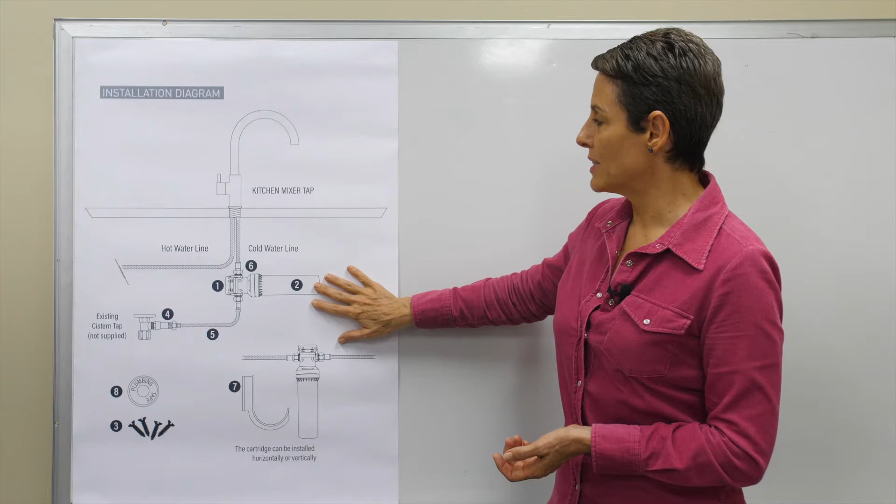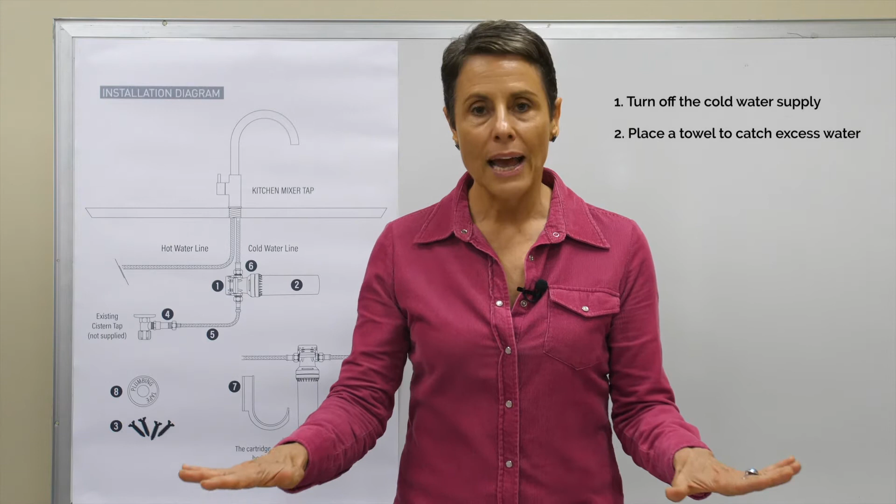Before I take you through how to actually install the filter system, there are a couple of things that you need to do first, and they're important. You need to turn off the cold water supply underneath your kitchen sink. There's a little tap, go and turn that off, and then place a towel underneath to catch any excess water. And then you're going to disconnect the cold water hose from your mixer tap.

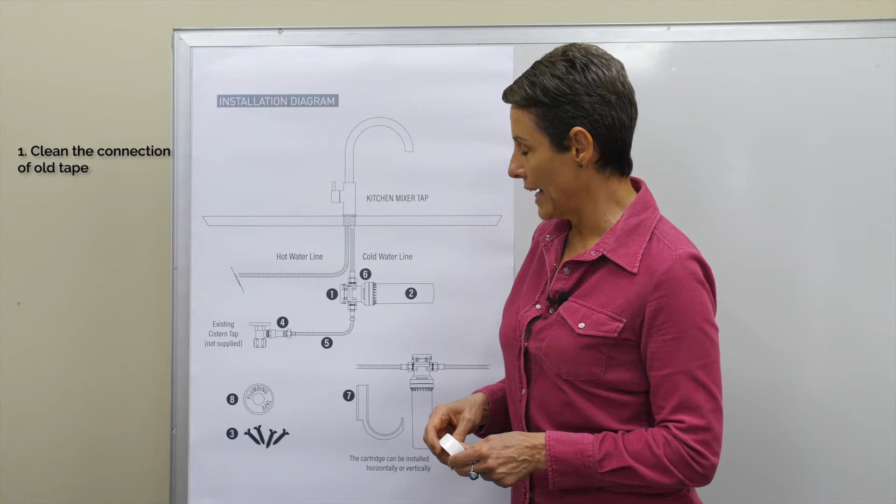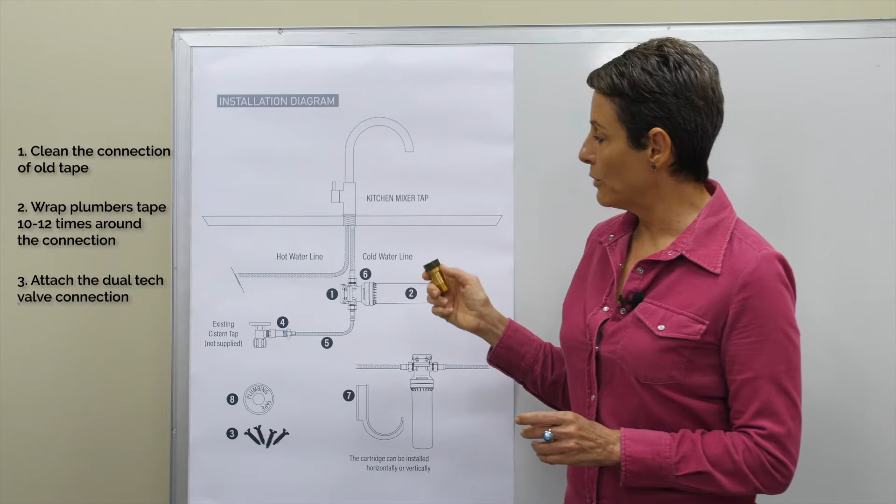So once you've disconnected the hose, you're going to clean the connection of any old tape, and then you're going to wrap about 10 or 12 times some plumber's tape around that connection, and then you are going to attach the dual check valve to the connection that you've cleaned and wrapped the plumber's tape around.

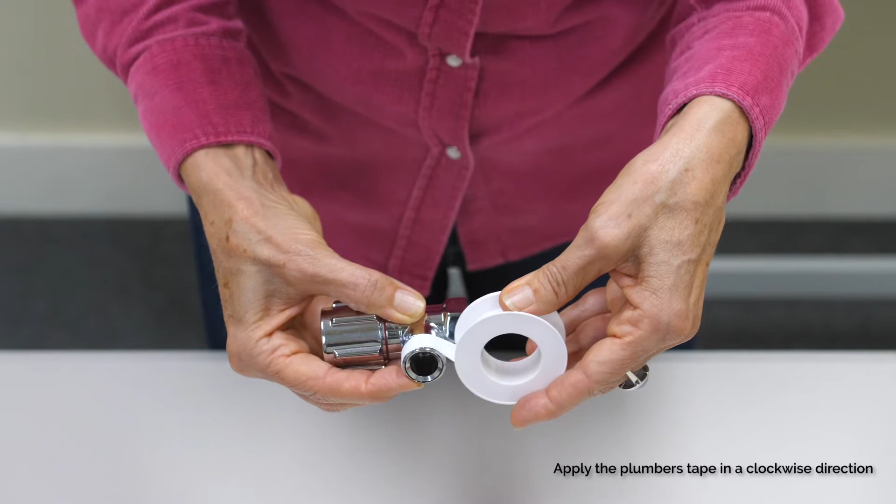A tip when you're applying the plumber's tape: looking at the actual thread, at the end of the thread of the tap, make sure that you apply it in a clockwise direction, and if you actually have the tape rolling underneath, you'll see how easy it is to bring it around. Just make sure you do it in the clockwise direction as I am doing it.

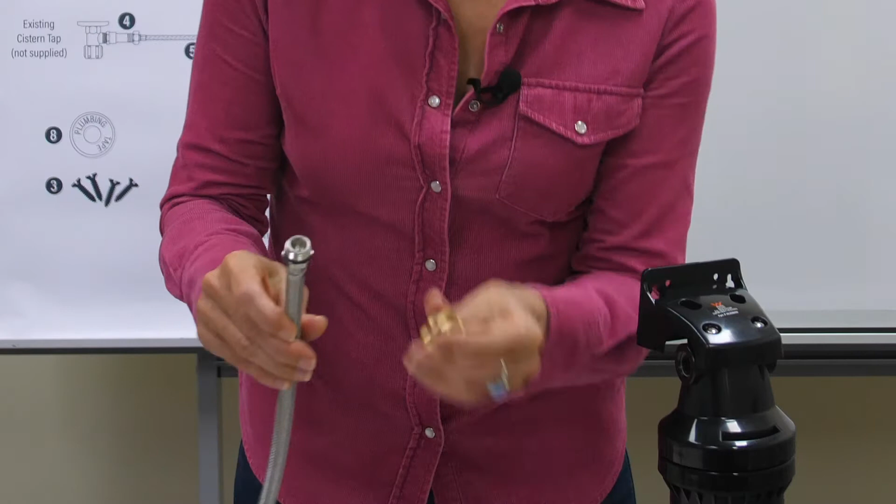So what you'll notice on the head is there is an inlet side, and it says in, and an outlet side which says out, which corresponds to these two fittings that I'm about to show you. Before I move on to that, it takes me back to the important notice which we really want you to read, because if you use any plumber's tape or sealing compound, you will void your warranty. On these two fittings, you will notice that there are O-rings. So please don't use any of the plumber's tape or sealing compound.

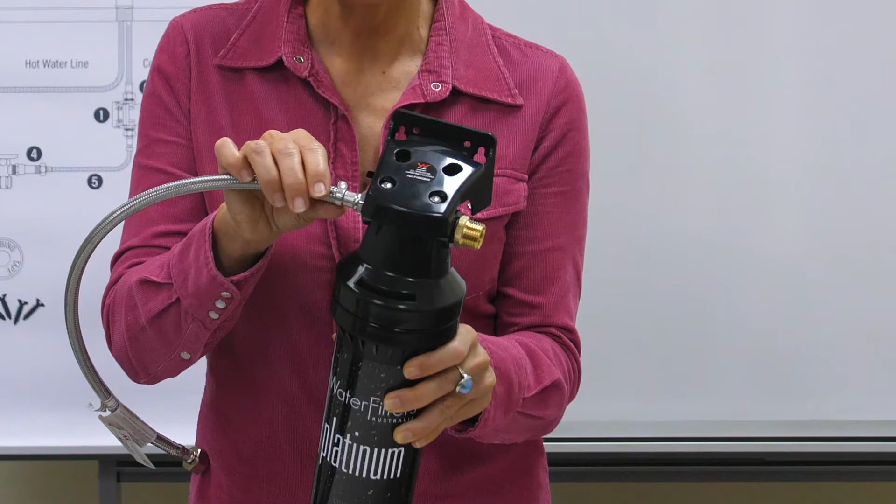And this part goes into your inlet side there, and the brass hex nipple goes into your outlet side, like so. One more tip when installing these fittings: just make sure that the O-ring touches the filter head, and then turn it 1/2 turn, and please don't over tighten.

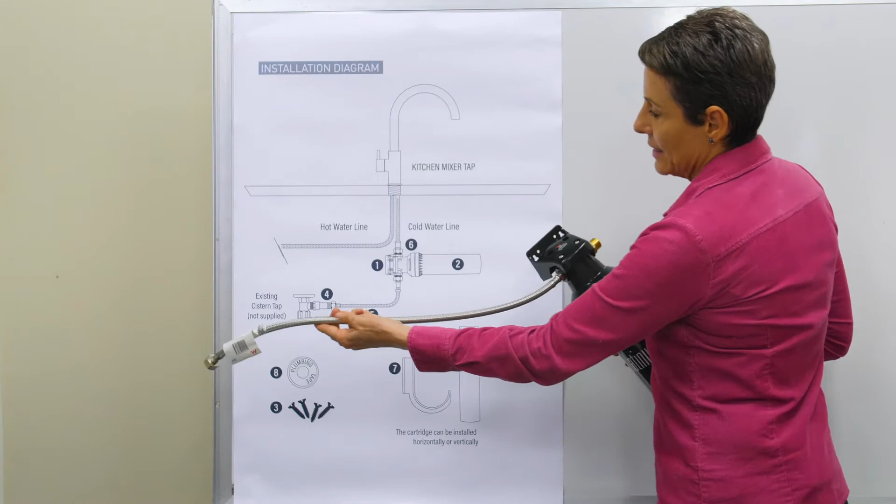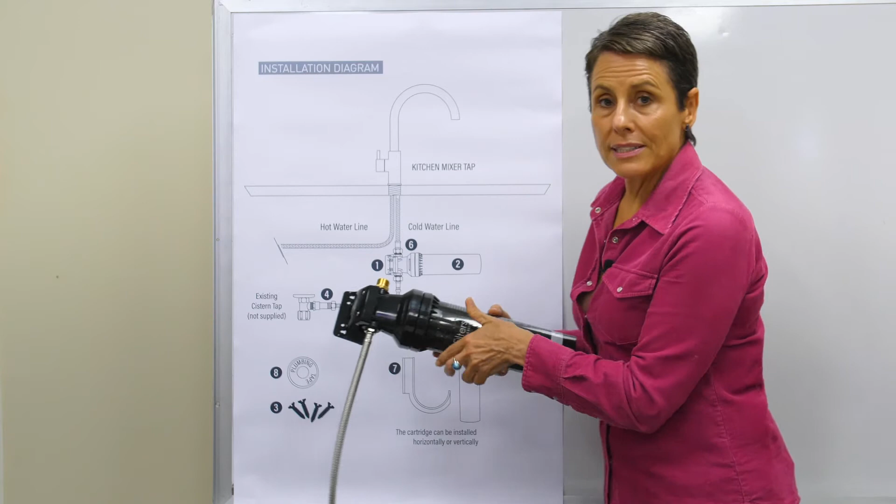Next, you're going to work out the best place underneath your kitchen sink to install your filter system. Remember that this line is going to attach to your existing cistern tap, and this is going to attach to the cold water line up to your kitchen mixer tap. The beauty about this system is it can be installed either horizontally or vertically, as in the diagram.

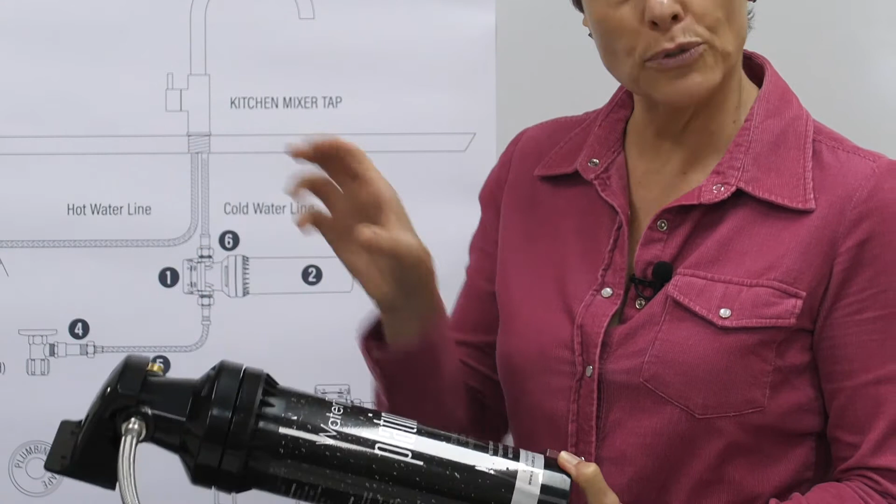It's important when you've chosen where you're going to install the system that you do leave enough room for when you come to replace the filter cartridge in a year's time. You need enough room to take the filter cartridge out and to reinstall a new fresh filter cartridge, and also make sure you don't crimp the flexi hose.

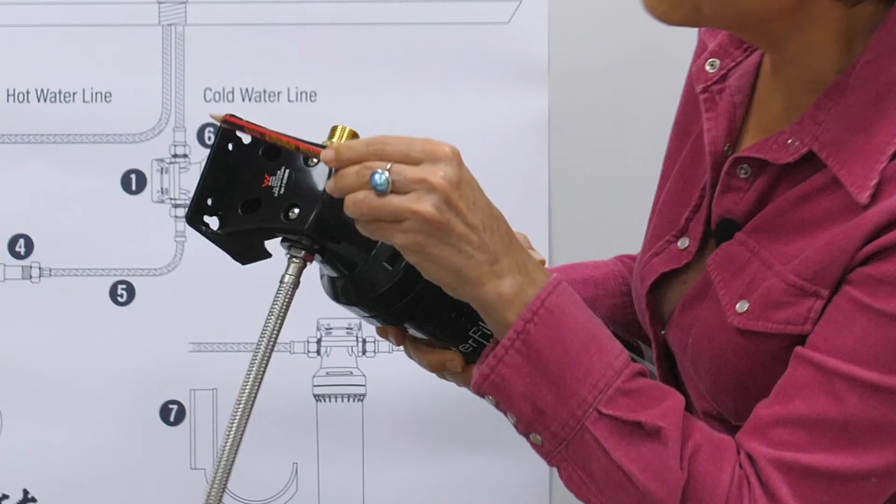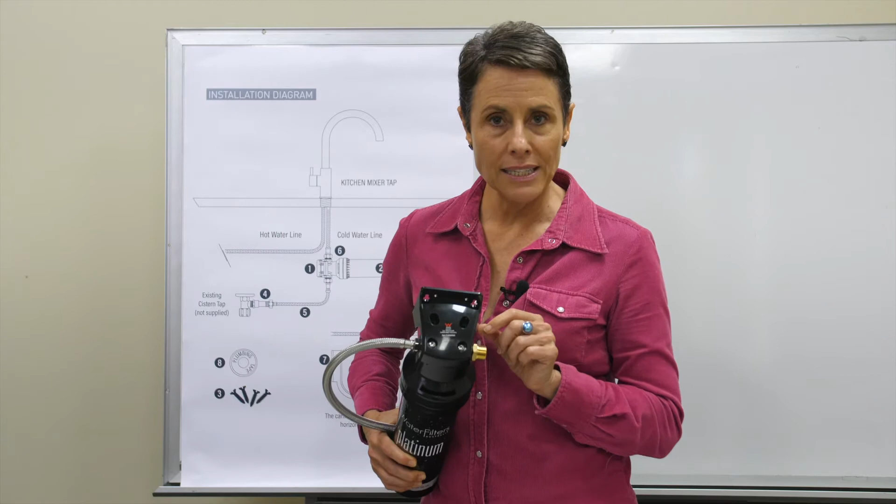Now, once you've worked out the best place for your filter system, grab a pen or a pencil and mark through here on the head in these little keyhole things where you're going to be screwing in this head. Another hot tip for you: if you need to reverse the direction of the inlet and the outlet, all you need to do is unscrew these 4 screws and flip the head around.

Once you've worked out and marked where you want to install the system, using the screws provided, screw the head into position, and if you are going to install it horizontally, then you'll need to also screw the mounting bracket in to support the filter cartridge. Next, you're going to take the inlet hose and attach it to the dual check valve, and don't use any plumber's tape, it's not required for this fitting.

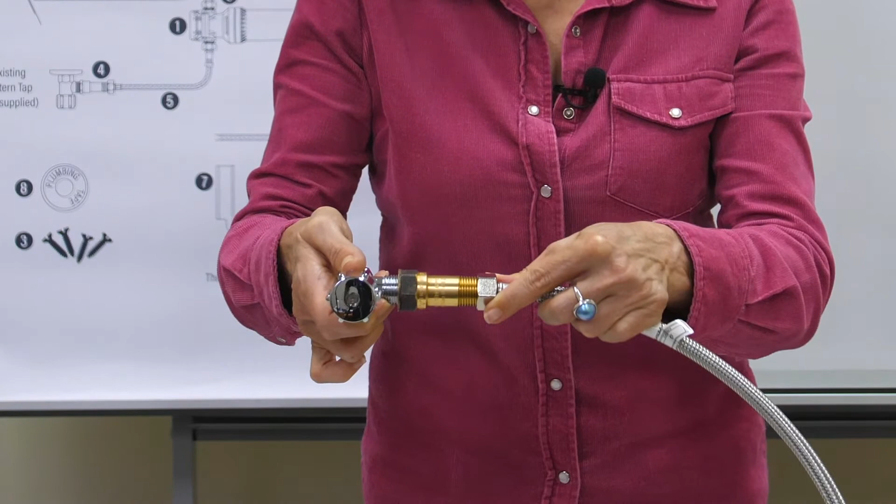And then you will attach the cold water line from your kitchen mixer tap onto this fitting here. Now your filter system is installed. What you can do is turn the cold water back on, and this will purge the system of any air. Sometimes the water can look a little bit cloudy. That's just compressed air in the system, so just let the tap run through the filter system for about 1 to 2 minutes, and it should clear in time.

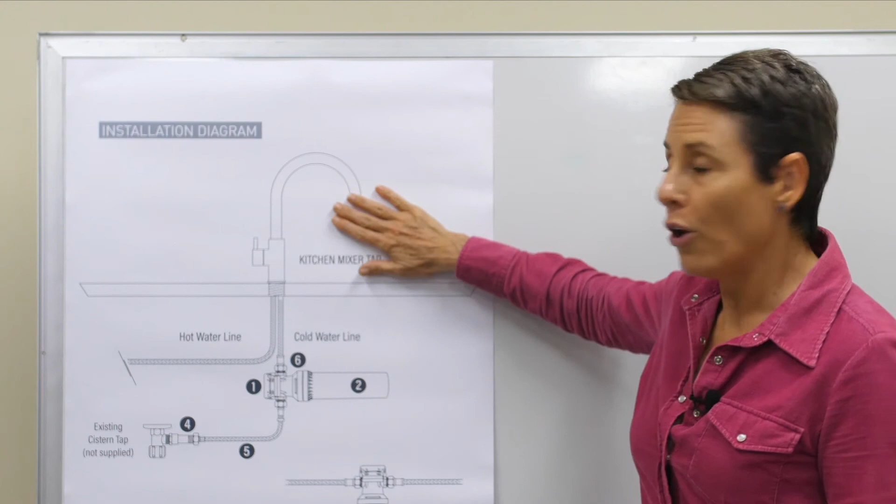After you've done that, turn the mixer tap off and check for any leaks. And everything should be fine, and you can now enjoy freshly filtered water directly from your cold mixer tap.

Next thing, as I said in the beginning, please fill in the warranty card and post it in, reply paid, or you can go online to wfa.com.au and fill in the online warranty. In a year's time, you will receive an email as a reminder to replace your filter cartridge, and you will have ongoing freshly filtered water and ongoing warranty.